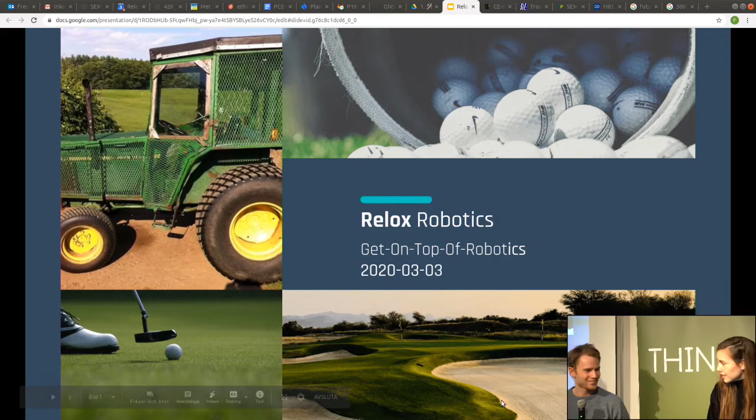Okay, we're ready. Hi everyone, I'm Marcus, and this is Fredrika, and we are from Relox Robotics. We develop mobile autonomous robots, and in this presentation we're gonna start by telling you a bit about what we're doing, who we are, and why we're doing it, and then hopefully give you some advice and tips and tricks we've learned during our journey with this company. So let's get started.

Here you see a range, our first customer, or place for our robot. This one is a bit larger than what they commonly are. Here people are standing in a long line, hitting golf balls on a large field, and over time these balls get spread out randomly on the field, and somehow they need to be collected. So how do they do it? Today they have a tractor or golf cart they use to collect these golf balls, and they also have a trailer in front of the cart that collects the balls.

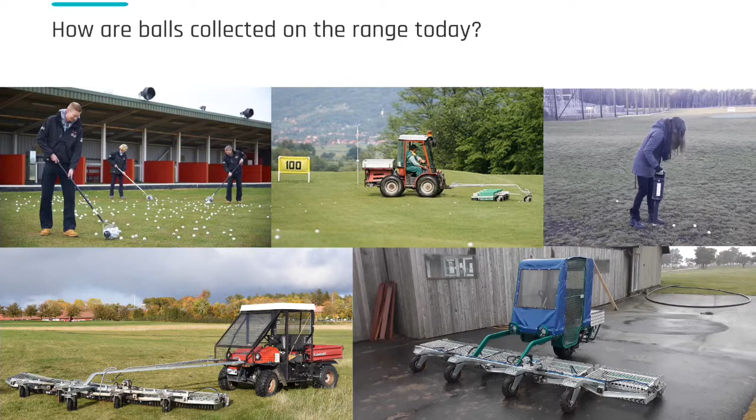In some cases they actually have even simpler equipment. In the top right you see Fredrika testing one of these more simple ways to collect golf balls. As you can imagine, it's quite time-consuming doing that compared to the picture I just showed you. So we simply want to replace this time-consuming, costly, repetitive, and boring job with a fully autonomous robot instead.

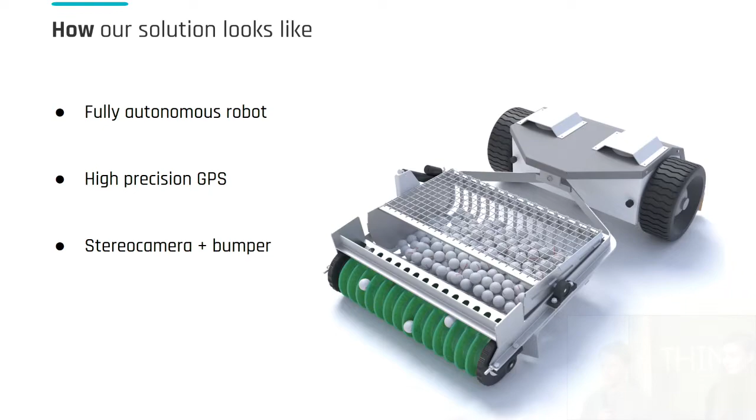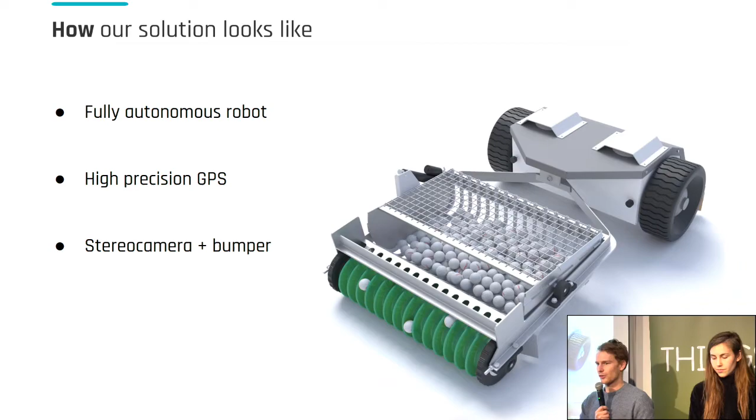We are using a high-precision GPS solution called GPS RTK to move around on the field, and that gives us a lot of advantages. We can optimize the path the robot is taking depending on where the golf balls are, etc. We also have a stereo camera and a bumper on the robot to avoid hitting objects such as signs or flags on the golf field. And we're using 4G, so we can do over-the-air updates to the robot.

And we also got into KTH Innovation while we were studying, and then eventually we got into Sting. For over a year now we've been here at Sting, so we have a room just above us that we are sitting in.

Quite quickly there was a lot more work than just building the robot, which we think is the fun part. So we had to have more people helping us with building a company. That's why we hired a CEO called Fredrik, who has some business background. And then we also hired a guy called Mats, who's helping us with sales and partnerships that we have.

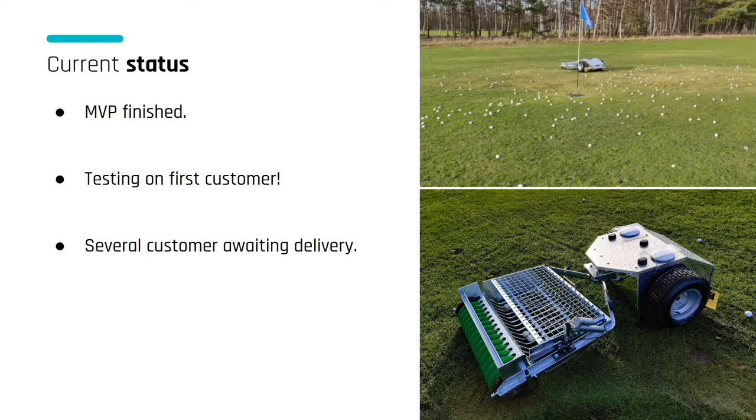So where are we at now, you might wonder? At the moment, we have our minimal viable product finalized. Now we have started testing it on a golf course here in Stockholm, which is one of our first customers. So once we have done all of the tests that we feel are necessary, then we are ready to deploy more robots in Sweden, primarily to start off with.

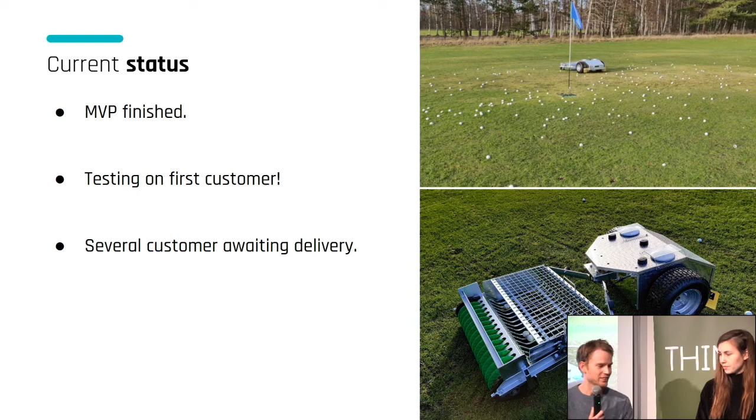And we already have several customers who are waiting for this type of product. So that was a bit about the company and what we're doing.

Yeah, so it's been quite a long journey from idea to MVP, and here you can see some of the iterations that we did along the way. We've also encountered quite a lot of problems during this journey, and today we wanted to share some of these with you so that you don't fall into the same pitfalls that we did. So if time travel was possible, we would like to go back in time and give ourselves a couple of pieces of advice to save ourselves a lot of trouble.

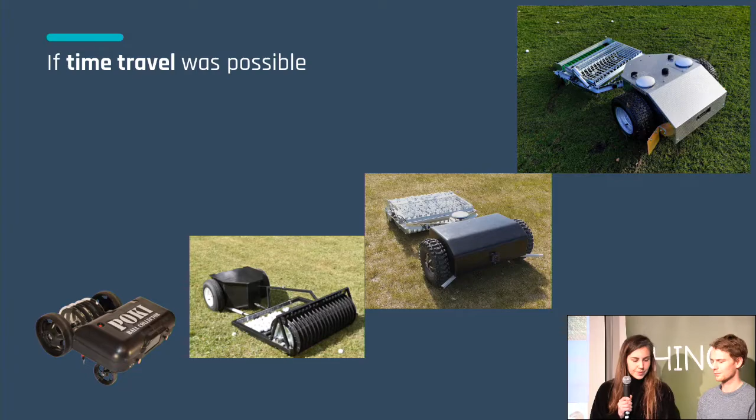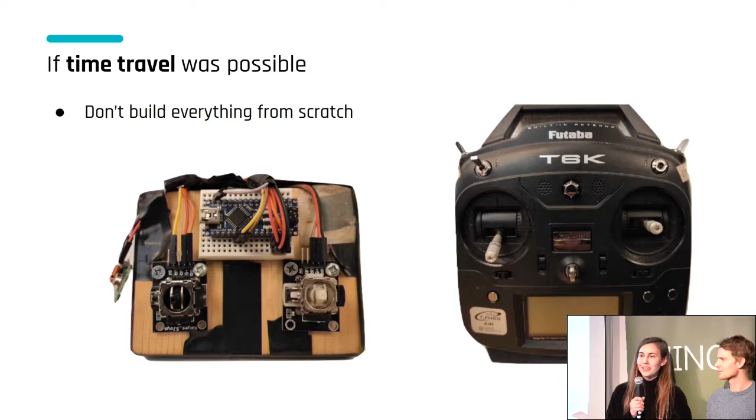So my advice here would be to spend a bit more time in the research phase, look into different ways to solve a problem, and not just start implementing the first thing that comes to mind. And furthermore, this is not even part of the core functionality of the robot. It's just a device that we use to make the testing procedure easier. So I would also tell ourselves to focus more on the core functionality and not get sidetracked by projects like this. And even from an economical standpoint, it doesn't make sense.

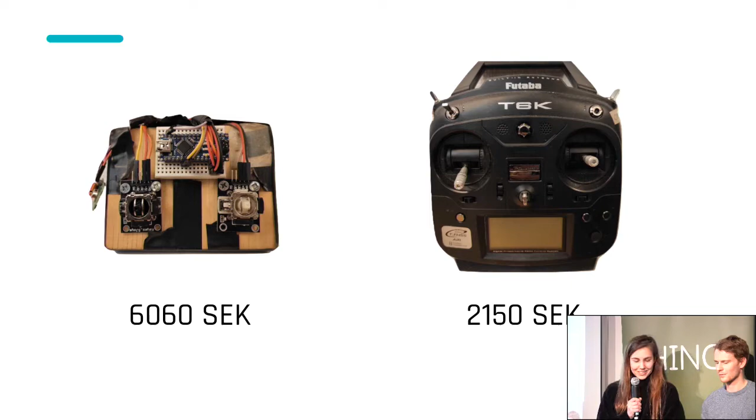Because even though this controller is a bit pricey, if we calculate the development cost for our own RC controller at 360 Swedish kronor an hour per person, maybe one day with 2 people to finalize this, plus maybe 300 kronor for component cost, then we end up at more than 6,000 Swedish kronor, which is way more than the controller.

The second mistake that we did a lot was that we were afraid to change our design choices, even though we started to realize that they might not work out. For a long time we used hub motors, shown on the left picture here. It's like a wheel with a motor inside it, which was very appealing to us because then we could easily mount it on a chassis and there would be no moving parts inside the chassis. So we liked that design very much for those reasons.

But we quickly encountered 2 problems with the hub motors. The first being that it was difficult to find a model that had enough torque, and the second one was that they do not often come with encoders with high enough resolution, which we needed to get position and velocity feedback.

So we tried to find workarounds and fixes for these problems, and we created a lot of ad hoc solutions, but all of these just created more problems in the end. So what we should have done is really take a step back and see what other solutions exist, and not stick to a bad idea just because you already spent a lot of time on it, even though it's very easy to do that.

So in this case, the alternative solution was to implement a full powertrain, including a wheel, motor, gearbox, encoder, and brake. In the beginning, we were afraid this would be more mechanically complex and take too much implementation time. But after a little research, we realized we could make the solution quite compact. The powertrain we're now using you can see in the picture to the right, and it doesn't take up much more space, and it's quite easy to mount. So that was definitely a change worth doing.

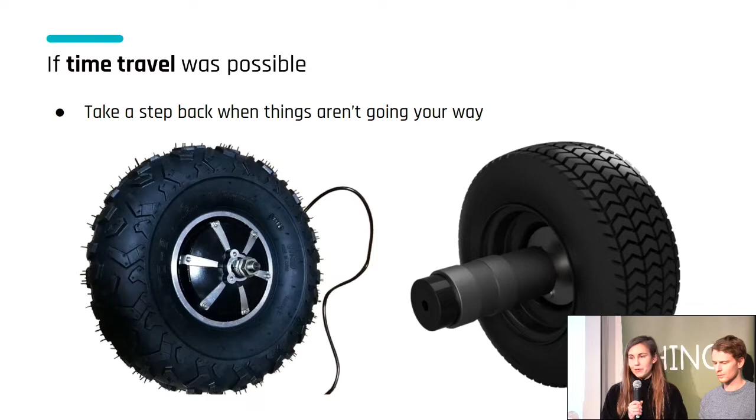So those were some of the mistakes we made, but there were some things we did well from the beginning. We realized that even though our idea was quite simple, the execution was difficult because you need a lot of knowledge in mechanical construction, electronics, and programming, and a team of just 4 people on the tech side could not have expertise in all those fields. So instead of keeping the idea secret, we had an open approach, talking a lot about it to different people, and that gave us a lot of benefits over the years.

For example, we started talking to golf clubs very early on to see what they wanted out of this product. We quickly found out that we have one competitor already on the market, called Belrobotics, shown in the top picture here.

We heard there was one golf club in Stockholm that already had a solution implemented, so we went over there to chat with them, and they gave us very valuable information about this product because they weren't completely happy with it. Firstly, it was just too small and didn't have enough capacity, so they would still have to go around with a tractor and manually collect the balls. Also, since it's just one robot that collects the balls inside itself and drags along dirt, etc., it would need quite a lot of maintenance for that reason.

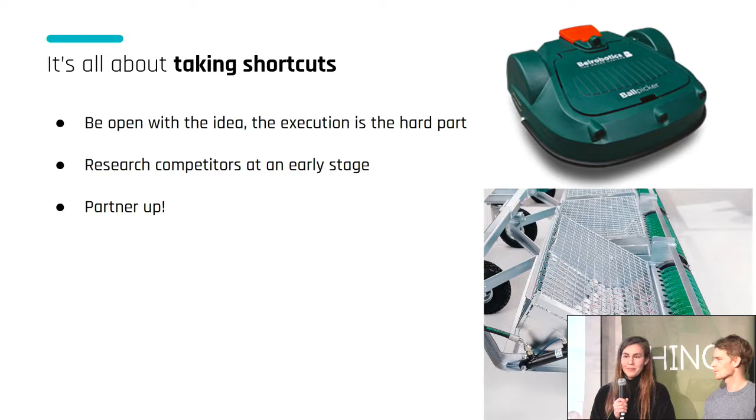Today we have a pretty successful partnership with them. They will do the production of our robots, and they also have a huge sales and customer network that we can access. Through this partnership, we can still focus on the parts we find interesting, which is developing better robots.

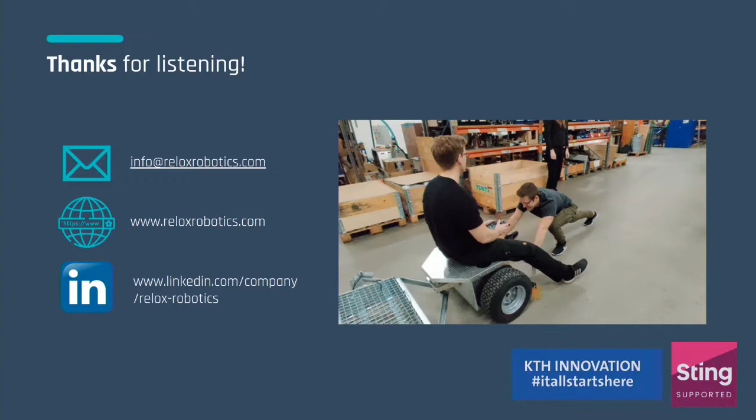So that was just a quick presentation from our part. Hopefully you got some tips and tricks on how you can more easily make a hardware related product. We're gonna be around, so feel free to talk to us afterwards if you want help with something, or if you want to know more about us. Thank you.

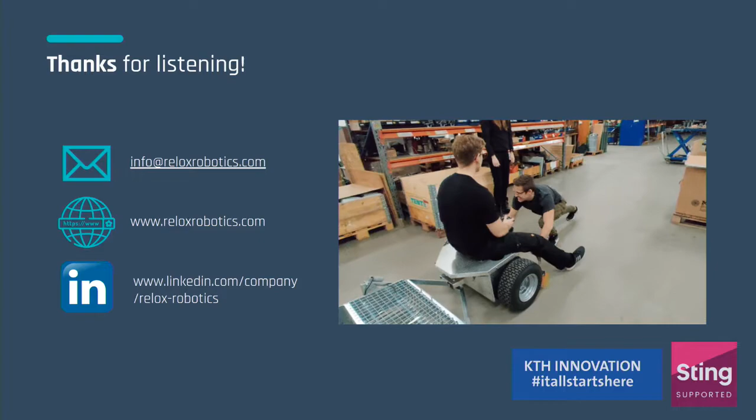Considered having a mentor that would give you that advice? Could you get that now?

Yes, like we have now, so that's something we realized later on. We didn't have one in the beginning, but now we've been in contact with many different people. We try to ask for help whenever we encounter a problem. For example, we have a PhD student in mechatronics that we have meetings with quite frequently.

Well, I was more thinking, you're a typical KTH student, like myself, just very technically focused.

Yes, in the end you need to sell it, like you said, you have a CEO. So this is what I would expect from a mentor, to have this overall view.

Okay, you both need a product and perhaps find a company and blah blah blah blah blah. All this. Yes. So,

No, but that's partly when we realized that we needed to expand the team when we hired Fredrik. So he has that role a little bit, but yeah, on the tech side, of course, there is still need for mentors. But now you have a very senior person in the board. He's very good, if you ask me. He's a very good mentor. So I think you're right, it's very important, you navigate very well. I'm really happy to have you here. And it's funny when you describe your journey, it sounds like it's 35 years, but it's rocket speed. So great, thank you so much.

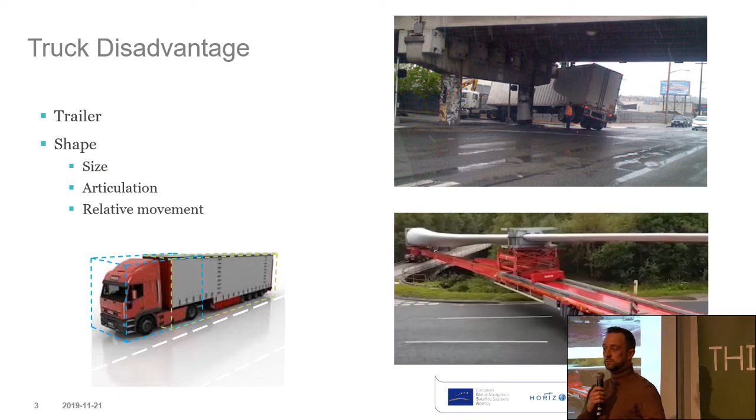However, trucks do have an advantage. I've talked about technical disadvantages - here I'm going to talk about more business rollout of autonomous vehicles advantages. So trucks do continue to work autonomously in controlled areas: mines, ports, depots. If you've seen Volvo, they've announced Brønnøy in Norway, which is an autonomous truck taking chalk or lime from a mine face to a depot. Because it's a controlled environment, you don't have to have the same safety requirements on the system.

And another - with the type of industry that you have, trucks are very, very much in use there. However, when you're in a controlled environment, you do want to take that produce somewhere else. And that's why motorways are the next key thing for trucks, hub-to-hub transport, whether it's port to a logistics center or a mine to loading a boat or something. It's a commercial application, so there aren't very many private people who have a truck.

Which means it's a business-to-business model. It means you can facilitate selling your service, whether it's transport as a service or you sell an autonomous vehicle to a customer - that's much easier to get out to the market. And they're already doing highly autonomous operations, so it's not a new thing for their customer base to accept. If you liken it to Uber, it's a new model for private citizens, whereas commercial customers are already used to this type of application.

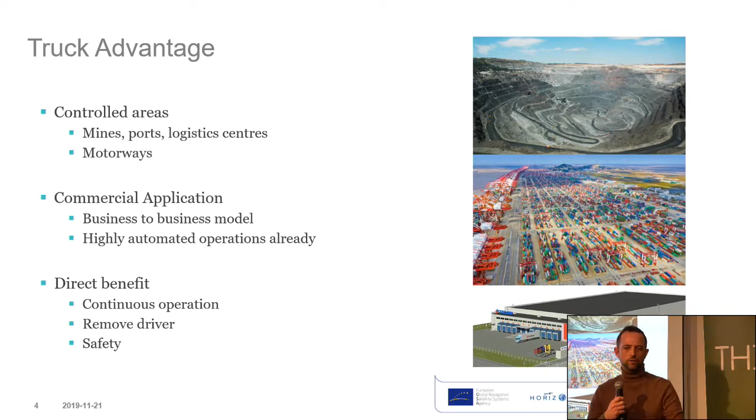If you're all familiar with robotics, I'm sure you're all familiar with this: sense, perceive, plan, and act. I've added test - when we're talking about real products, we actually need to verify that the whole system operates even in unexpected environments, as one would expect, or safely at least.

I'm going to focus on sense and perception, which is what Waysure were involved in predominantly. I've listed the partners and their main responsibilities. Scania effectively were right through the system as the platform owner, but specifically they worked on the planning aspect and implementation of the recommendation to change lane or brake or whatever was decided.

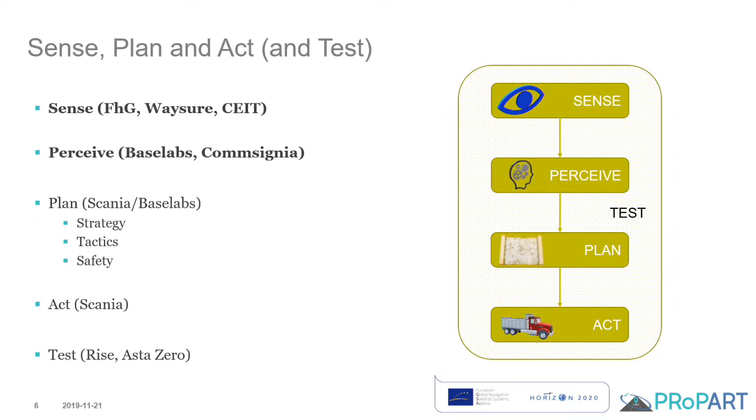So focusing on sensing, high precision positioning is what Waysure delivered along with Fraunhofer and CEIT, which is a Spanish research institute. We use GNSS - we get to about 2 centimeters absolute accuracy. It's the same system that Relox introduced, RTK INS. We do it in trucks, which has its own unique problems. We also use ultra wideband, which is a local ranging - it's still a radio frequency positioning technology, but it's good to augment GNSS.

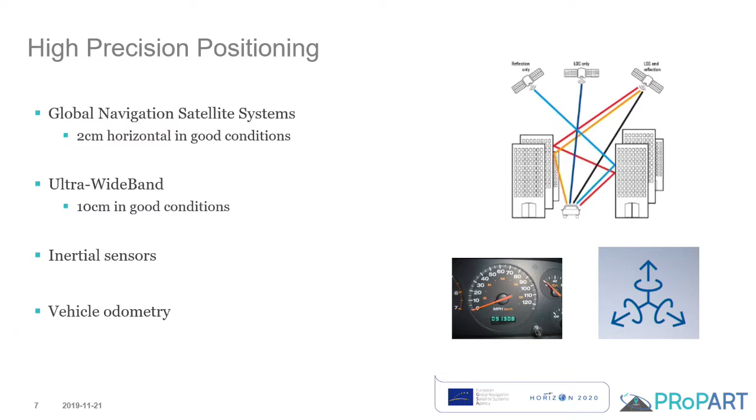As you can see from the picture, GNSS suffers from multipath occlusion and various other things because the satellites are - well, it's like trying to see a 20-watt light bulb that's 21,000 kilometers up in space. It's quite a weak signal when it gets to us. We also use inertial sensors: gyroscopes, accelerometers, magnetometers, barometers if they're good enough, and vehicle odometry, wheel speed or differential wheel speed. Putting all that together gives us very accurate position, velocity, attitude and heading, which is required for trucks.

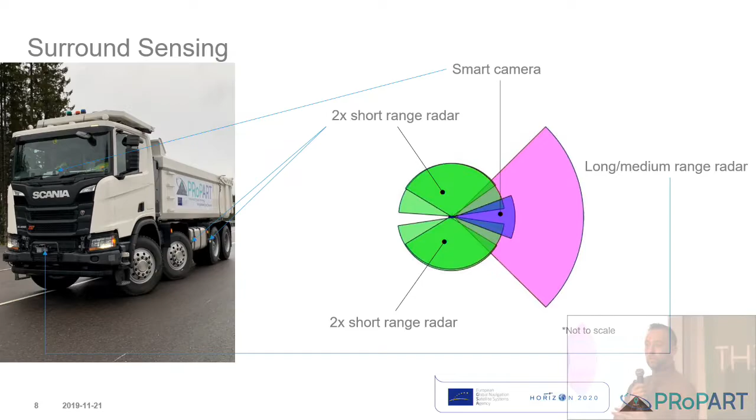Surround sensing - so positioning is great, but it doesn't tell you where anyone else is, so you have to be able to see. In the application, we used a long, medium range forward-looking radar, side-looking radars, and a camera. We had LiDAR, but we weren't allowed to use it.

Maybe a little aside - being a small company working with a large company, your access to specific parts of the CAN bus or data is very limited because, of course, they have their own relationships with other suppliers of competing or similar technology. So if you are looking to work with large companies, there is some friction there. Obviously it's still beneficial, but just a heads up.

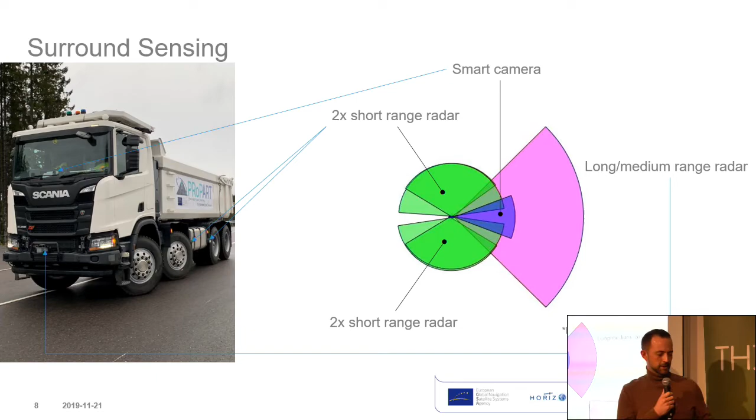So the infrastructure we put in place so that we could see behind the vehicle was a traffic radar on the side of the road. This is the traffic radar here, and this is an ultra-wideband unit, which we used for local ranging. We also put GNSS corrections in place—to get down to 2 centimeters, you need a correction service, and we put that in the infrastructure.

Now, the purpose of the project isn't to suggest that at every on-ramp there will be roadside infrastructure. Some people are implementing that in Austria, Hungary, and Italy, but it's a large step to expect a radar at every on-ramp and off-ramp. This was really to demonstrate that if a truck can see behind itself, even from someone else's information, then it can operate safely.

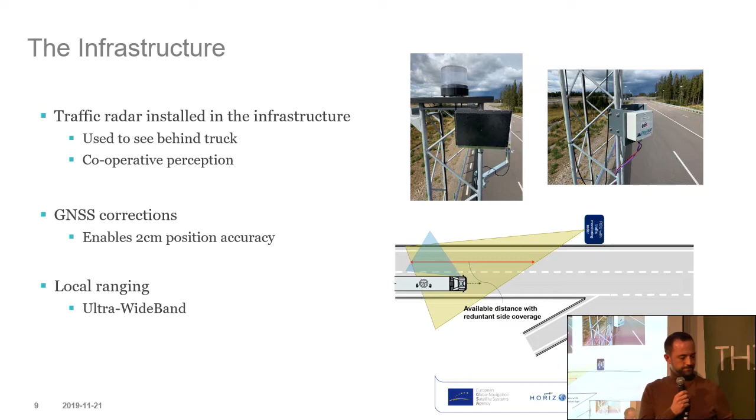So perception—when you combine all of this information, position with respect to a map, onboard sensors, offboard sensors—what does that tell you? Well, hopefully it tells you if there are any vehicles in the lane which you wish to merge into or ahead of you.

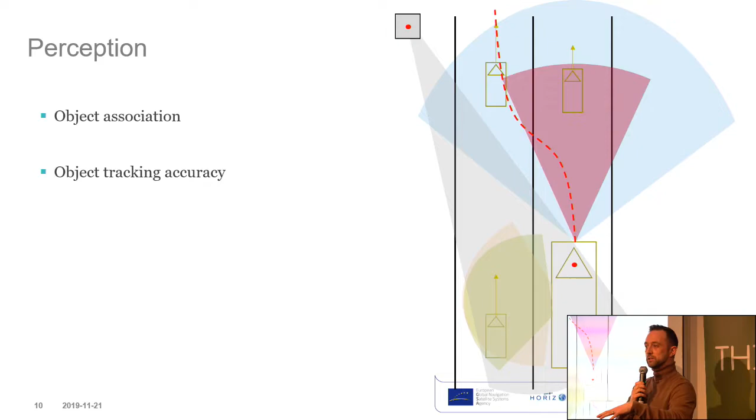Key to understanding the perception is, can you associate objects? Without getting into too much detail, if you see a car in front of you and the traffic radar also sees a car in front of you, is it the same car or multiple cars? If you don't have good enough accuracy, can you associate all of these different objects you're seeing around you? And how well can you track them? Does having more information about something mean you know where it is more accurately?

The results—there is a YouTube video which I can share with you. This is the highlight, which is that the driver was hands-free through the whole trial. I'll speed it up—I understand I've probably taken longer than I should.

The result of the trial was that the truck, throughout the whole test, could drive autonomously with a look, no hands, no movement from the driver. Braver than me—those things are pretty scary, and they turn pretty sharp. So that was the result of our trial.

I'll go into some of the lessons learned. For us, whether it's combining sensors that are on the same platform or on a different platform, having a shared reference matters—lever arms, for those of you familiar with it. If a sensor is on a remote part of the vehicle, you really have to make sure you understand where that is with respect to the center of the vehicle.

You also need a shared time base. If you're told where something is, that's great, but if you're not told when an event happened, it's pretty much useless. If you're told when it is, but it happened ages ago, it's pretty useless as well. So whenever you're designing a robotic system, all your sensing elements really need to be low latency, and they need to be synced with one another. Otherwise the information is not useless, but it's certainly less useful than it should be.

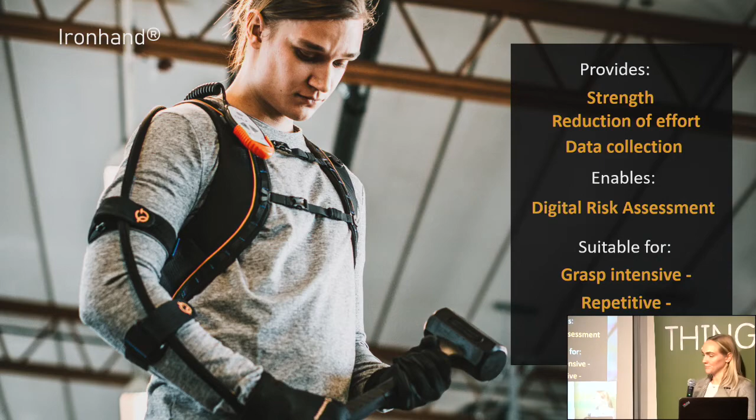So now you can see what the system looks like on my colleague. And the system is equipped with pressure-sensitive sensors on the fingertips and artificial tendons that run through the cord back to a power pack where the motors and the battery is placed.

So we are a company from Sweden, located in Kista here in Stockholm, and we are about 30 employees today. We were founded in 2006 as a project between two professors from the Royal Institute of Technology and the Karolinska University Hospital. They had an idea to help patients with a weak hand grip.

If you fast forward about 7 years, we launched our first product to the market in 2013, called the SEM glove. SEM stands for soft extra muscle, which is also the patented technology that we use in our industry glove.

In 2015, we started getting a lot of interest from industries to use the technology to prevent injuries rather than just helping existing injuries. When we started in 2006, we were one out of two research projects within the area, and the other one was General Motors and NASA.

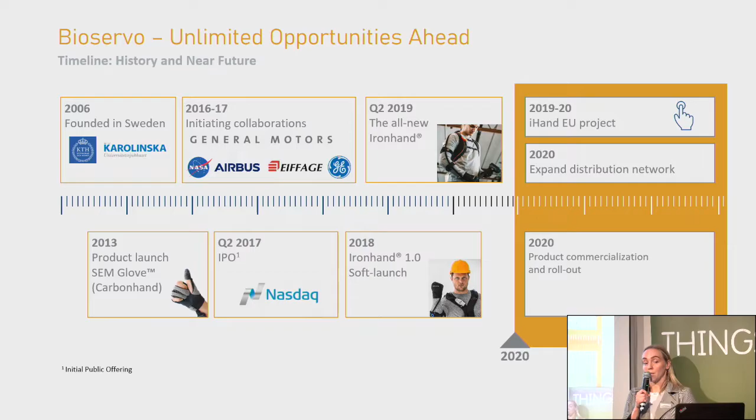During this year, 2020, we will finish our EU project, iHand, and we will further expand our distribution network as well as the product commercialization and the rollout of Ironhand.

Since we are a pretty small company, we need to make sure that we use our resources in the most effective way possible. For us, this has meant that we are focusing on a few well-chosen segments: automotive, aerospace, and construction. Within each segment, we have a partner that is helping us test the product in their daily environment and giving us feedback to make sure that the product is actually ready for the industry market.

In the third quarter last year, we signed agreements with a few partners for distribution of Ironhand. We signed partners in the largest markets, which are the United States, Germany, and France, and a few other European markets as well. In France we have two distributors: Gobio is for purchasing Ironhand, and Loxam is for renting out the Ironhand.

A few weeks ago, we launched Ironhand 1.6, which is the newest version of our system. This upgrade is very much focusing on the user experience of the system and improving it. We want the users to actually want to use the product, because we know that's a factor for success. Part of this launch was Iron Connect, a smartphone-based app for profile management and configuration of the Ironhand glove.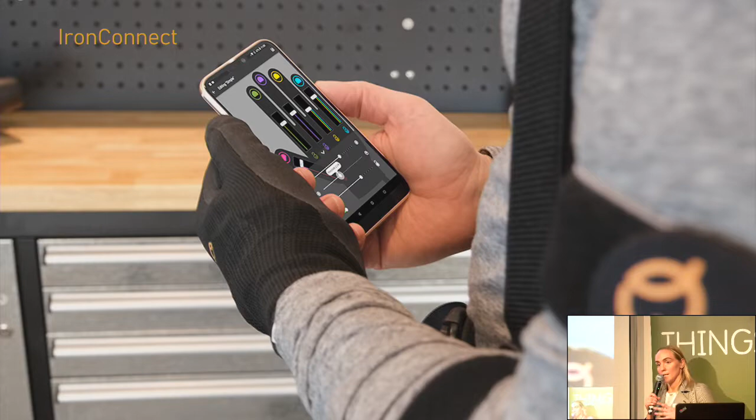This allows the operators to adjust the settings in the glove throughout the workday, but also to create customized profiles to make sure that the glove is suitable for their specific needs and their specific work task.

So, what are some of the success factors at Bioservo? We always strive to work very close to our customers to make sure that we actually fill their needs. Our customers' and partners' feedback has always been the basis for our development. We need to make sure that for each customer, we take in their feedback, and then we go back and develop and further improve the glove to make sure that it fits their industry.

We are also trying to be very agile and adaptive. For example, from the beginning, Iron Hand was only planned to be a strengthening glove. But as soon as the customers heard about the sensors in the fingertips, their first question was, can you collect data with this? From that moment, we started developing the digital risk assessment that we offer today.

We are always focusing on the user experience, and when we do improvements of the glove, we have the end user in mind. From experience, we know that if the user on the floor does not want to use the product, it would most likely just hang in a cabinet somewhere. So we are continuously trying to improve the product and make it more comfortable and easier for the operators to use.

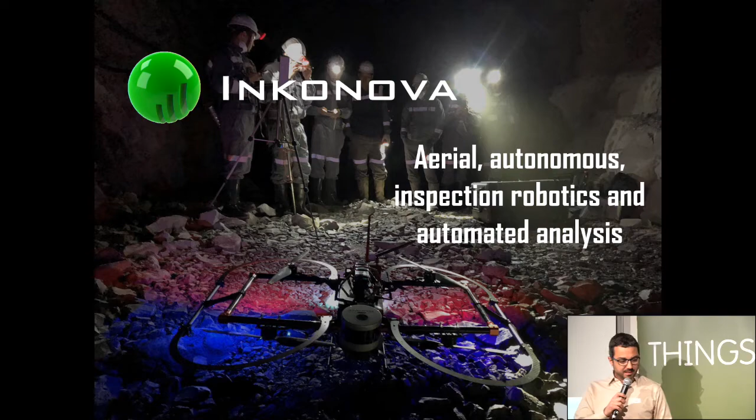Good afternoon, or evening for some of you. So my name is Pau Mallol, and I'm the CEO and founder of Inkonova.

Inkonova develops autonomous inspection and automated analytics for industries and industrial applications. We started 3 years ago with underground mining. What we do right now is commercialize a laser scanning drone that we fly in inaccessible areas and collect 3D data and generate 3D models using LiDAR.

You have here, you can take a look later, one of our oldest prototypes, but you will see pictures of the commercial unit that we just delivered last week in Chile. Unfortunately we don't have a commercial unit here. But this works, and we develop a lot of software first on the prototype, then roll it out to the commercial units later.

So in a nutshell, the problem that's very common underground in mining especially is there are many inaccessible areas. They can come from operations themselves, like when they blast an area, it's very dangerous, and you shouldn't get in there until it's secured, which takes some time. But there are also accidents and other scenarios. So it's very common to find areas that are inaccessible, or just difficult to access.

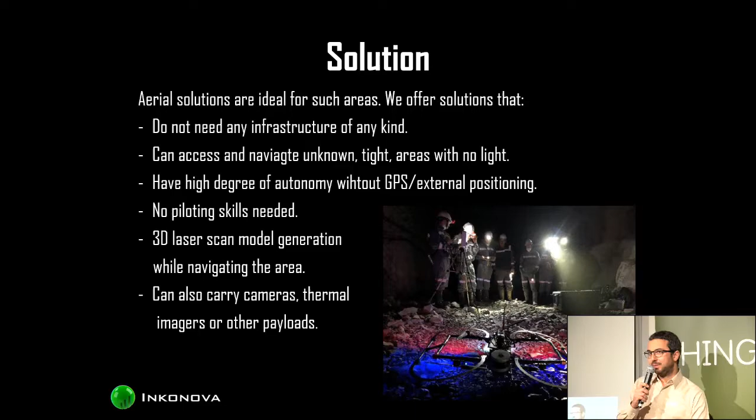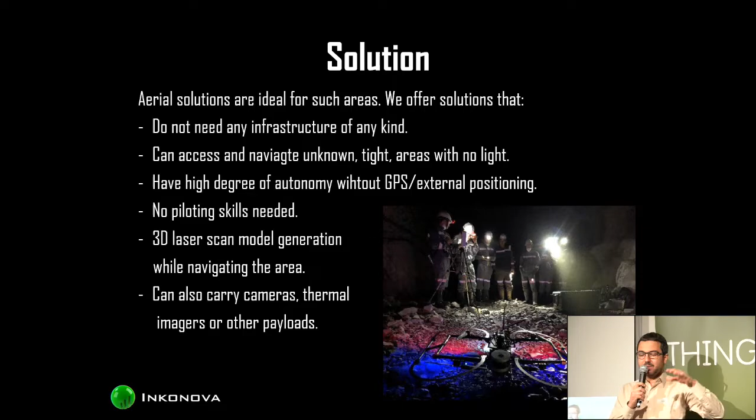That had several complications. First, the awareness - you see basically forward or where the camera points, but not in the back or the sides. Also you had to really have steel nerves. These are very expensive equipment, and if you lose a drone in inaccessible areas, you lose it, literally. You could have chains hanging, a lot of things popping out from the sides that are not easy to see.

So after that, we saw that we had to basically automate the operation of the drone for increasing safety, and especially for the user experience, to make it easy to use and easily adopted by the industry. We said, okay, we can't access this LiDAR that we are carrying right now, so let's develop our own laser scanning system.

Since you get 3D data in real time, you can use that for many cool things that I'm going to show you soon in a video. Not to mention you could basically base your collision avoidance on this 3D data and so on. So we started working on our laser scanning solution.

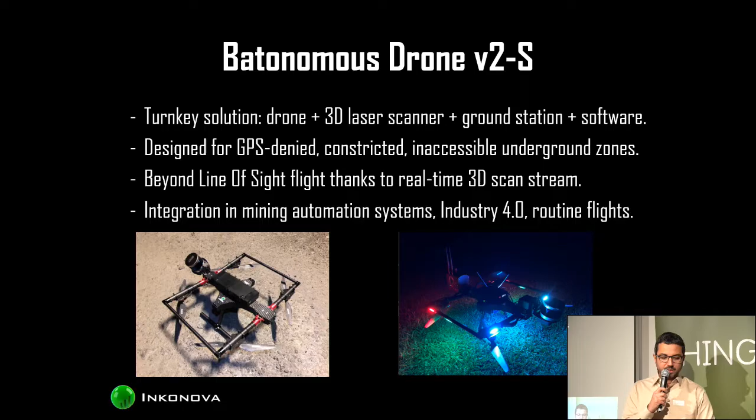This is a picture from Chile, the unit that we sold there. In a nutshell, you have the drone that we developed for underground. We considered using DJI and other off-the-shelf drones, which some competitors use, but there are disadvantages. First, you don't have real access to the whole software of the drone, so if DJI decides to stop offering the SDK or some access, or change something, you might have issues there.

And also, we learn a lot of lessons from these years flying manually underground. This drone is developed by us for underground environments, not as much this one, but the commercial one. Then this is a computer module and the LiDAR module.

Both are modular, can be released very quickly without any tool from the drone, and used for handheld scanning or whatever. So this unit can also scan above ground. We have done tests in parks and power lines and so on, because the point is that we use SLAM for localization. That's a big word that is important to mention. Otherwise, we couldn't localize the drone underground because there is no GPS or infrastructure. But the good news is that you can also use it above ground.

So I'm going to show a quick video, if I can play this. Oh sorry, the sound. One second.

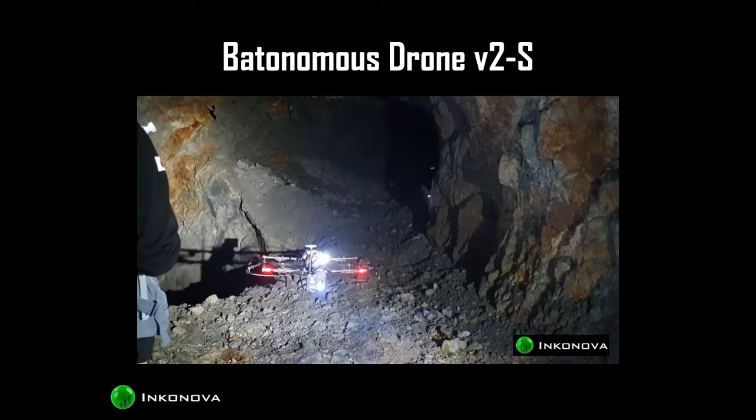So this is what we see in the computer in real time. We can put the drone anywhere and we see the point cloud, and we can actually, as you will see later, zoom in and out and rotate to find the best path later if you want.

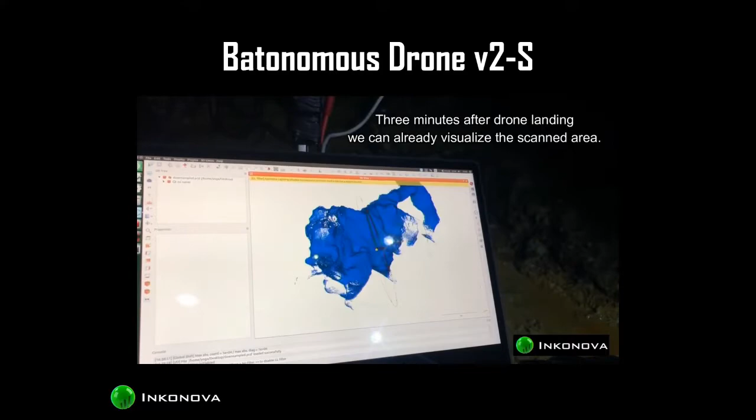So basically, sorry, I will, one second. I actually didn't want to stop it and go forward. Doesn't matter.

So what I wanted to show is that the map, the scan that you saw in blue right after the flight, this is what we call dual SLAM. We actually use SLAM for navigation and for processing the real-time data. So when we land, we just need to download the map and see it. We can see it underground and see if it went well, or if we have to repeat the flight or whatever.

And then the last picture, this was just one of 4 flights, and the result of this specific mission, let's say, was actually 2-level scans, which I'm going to show you in a second. So this is just a screenshot of rather old, actually. We keep improving the visualization, but this is basically what you see.

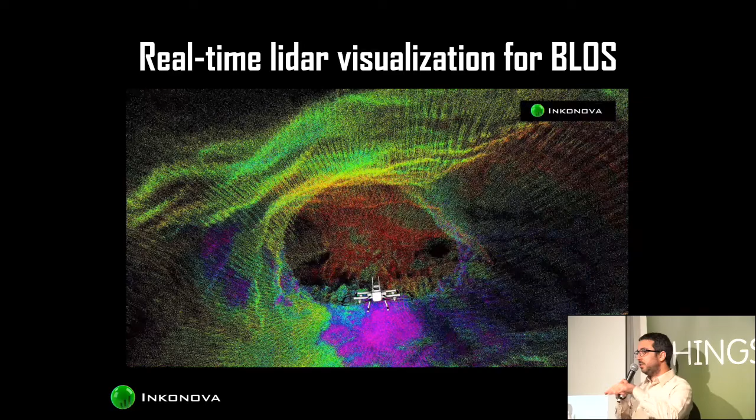You see the drone and the drone model, which is from our own design. And then it has the attitude of the drone, so you can see when it goes forward, as you have seen in the video, hopefully.

This is actually a very big scan that we made in Kazakhstan a few months ago. I want to highlight how actually quick one can do such long scans. Just to give you an idea, in these drifts, this is the size of a truck. Basically, trucks go in and out there, and you have also the scale here.

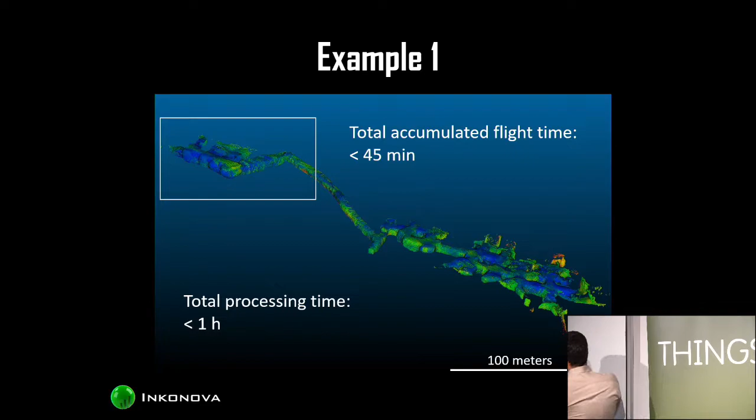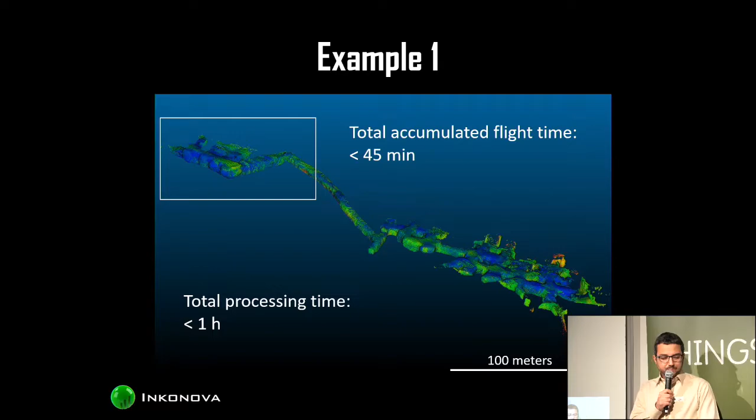But this was done in an accumulated flight time of 45 minutes, so not one single battery, but a few. And the processing time is approximately the same as the flight time. So it was actually under 1 hour.

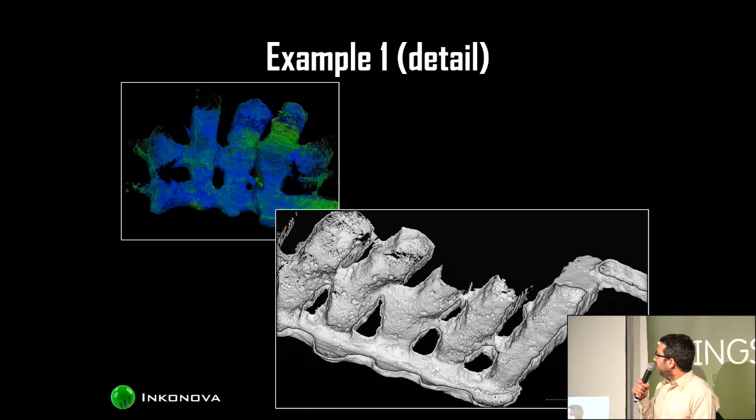This is actually a detail of the previous map. So we make a cut in the model, and you can see how detailed we can get it, with stones and so on. And this is what you saw before.

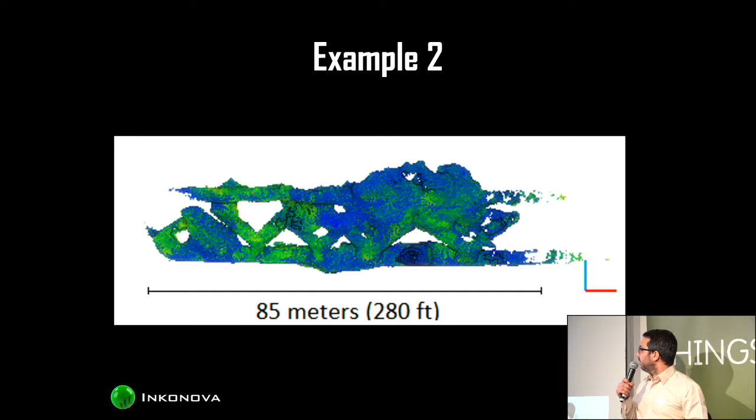This is a screenshot, so the quality is not that good, unfortunately, here. But basically, the video that you saw scanned this part here. And then what we did with other flights was the bottom level, 3 flights in this, as I'm indicating now. And then we merge, we have also a script that can actually merge maps automatically, because these individual scans have to be merged later.

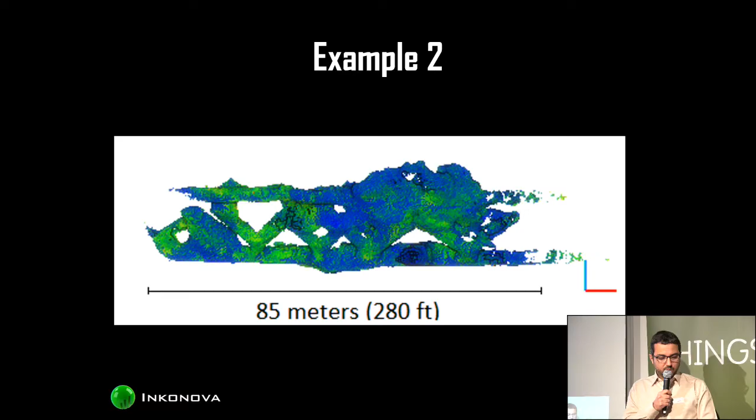So this is the conclusion of my presentation. And if you have any question or recommendation or advice, I'm here for you.

It's usually, sorry, the accuracy is, we use Velodyne LiDAR, and usually it's about ±3 centimeters. It depends on a number of factors, and the range is about 100, 120 meters, depending on the environment and so on as well.

Yeah, that's a good question. We are actually best at developing solutions and solving problems and finding problems that there are no solutions for. But right now, we are still talking to a number of local partners. Until then, we also have to service. So yeah, I have been 3 times in Chile the last couple of months. I'm going to Turkey probably this week, and next month in India. These are in talks. But yeah, both, I would say. For EU, I think we are also interested in doing services anyway, but we prefer to have local partners for mid to long term at least.

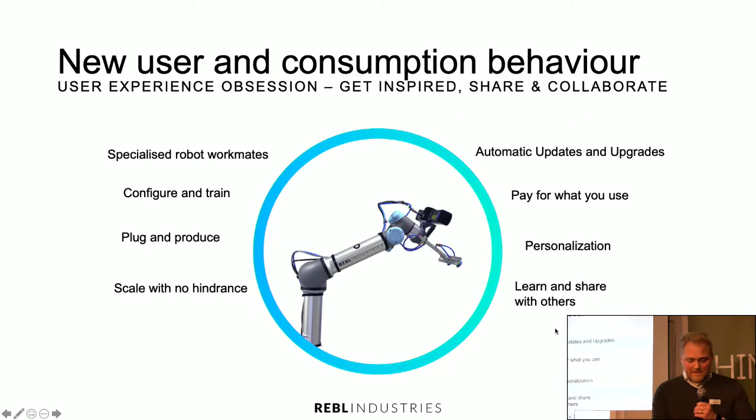So the baseline for everything in this world, I guess, is becoming fast, and fast in producing value. And this is what we try to live.

At REBL, moving into a bit more to the way of working and the solution and some movies, so you can see the flexibility in the concept.

So, of course, we have a lot of benefits working with robots instead of humans in terms of the employee contract. They can basically work whenever, whatever. They don't have any ambition in life, so what we train them for, they should be able to do and stay there.

So, our concept is that we're actually aiming to have a robot being able to be implemented in 2 days. I guess efficient time, we are like 4 or 5 days for our working installation.

So we're quite fast as we work with the configuration all the time due to the assignment, but we have some lead time usually. What drives up the time typically is when we need to 3D print a special tooling for the specific assignment, or work with a specialized quality assurance vision model or something like that. Everything that is special to that case, basically. But solving the picking, the grinding, the sanding, and so on, we can do really fast in that sense.

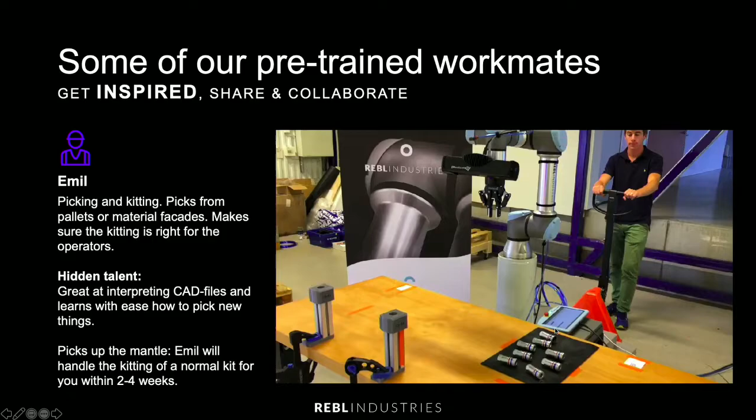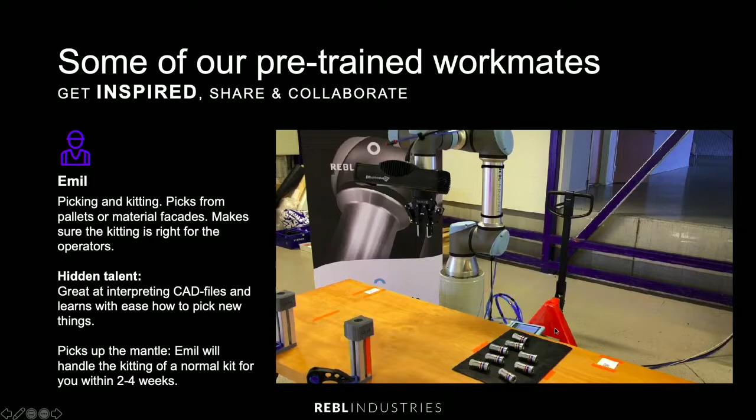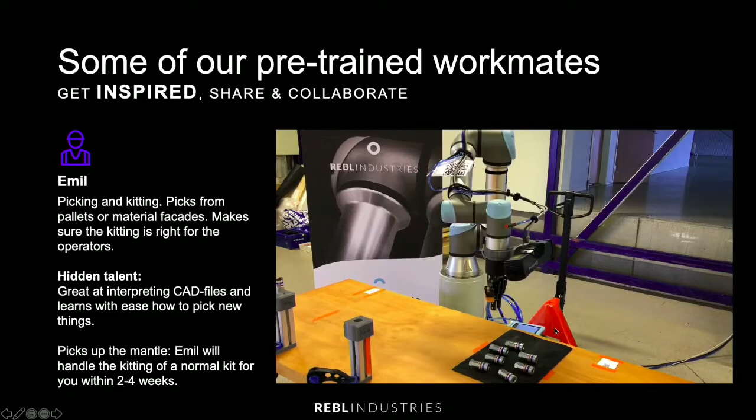Emil is coming to its workstation and starts reading up. This basically takes 10 seconds. What it does now in the background is updating its entire programming in how it came to it, how we did the virtual commissioning, and changing the configuration basically. And then it starts working. So this took us basically 2 or 3 days of work. And because we typically work with small configurations in how to scan and so on, we automate these things, but of course it's always something we need to work on.

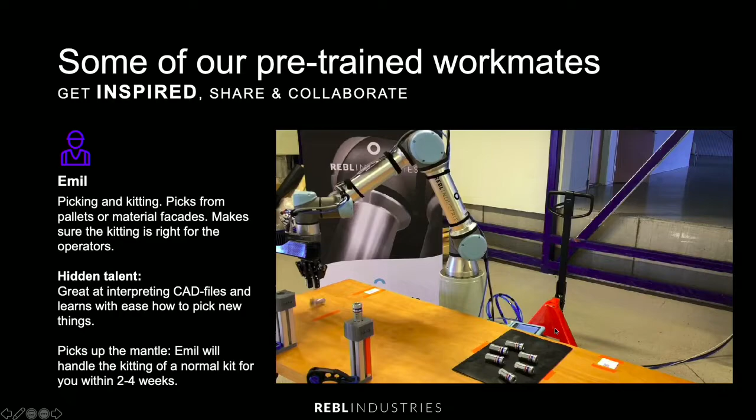Yeah, so that's one assignment. If we take another one, just showing a bit about how you can utilize 3D printing as a way of moving fast into the client and building workstations where the client has human operators, but also robot as operators, because every workstation we build should be able to sometimes be a robot there, sometimes be a person there. So here we have 3D printed tooling, because we need to use the vacuum tool in a quite different way when they do the assignment. We have 3D printed the way that the robot needs to work with the tooling, basically.

Once again, now we didn't see the element where the robot comes to its workstation and reads up on it, but basically it reads up on what type of object it's working on, how it should grip it, and how it should work with it. Just a way for you guys to see the concept in a sense. But as said, it's just as important to understand that this is a variable workforce, and sometimes you need to plan that now we want a human doing the work, and now we want a robot doing the work. And the robot should be able to, with no turnover time, move to another assignment and start working with it.

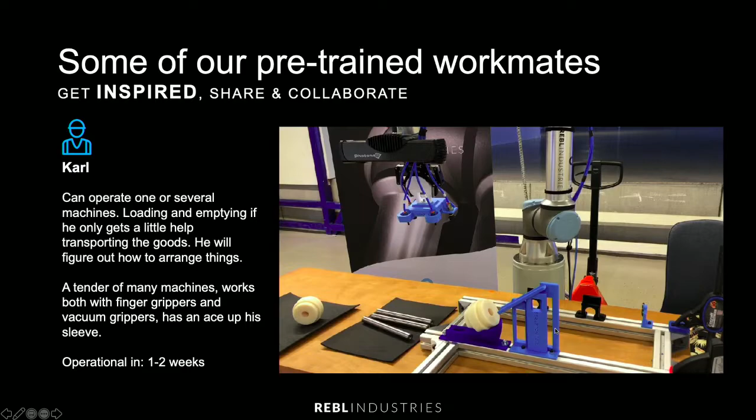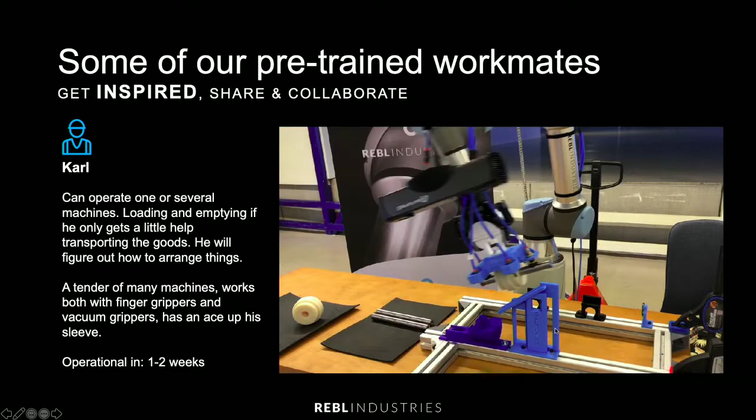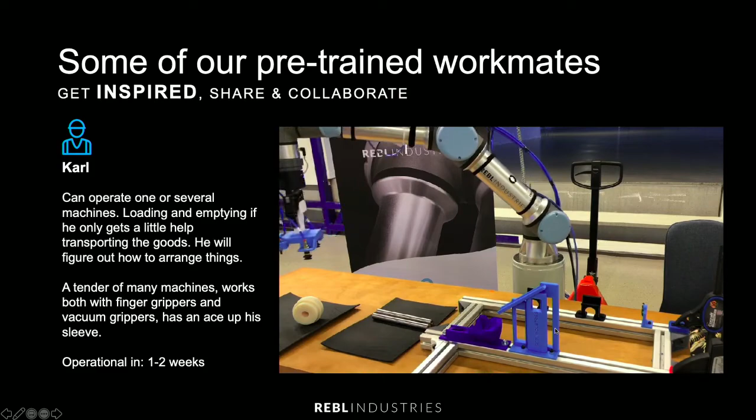So what we are building, I typically do the analogy to Sonos. I don't know how many of you are music fans, but their concept I like very much. When you put out speakers, you have some in one room, some in another, and you push your own playlist out, push another playlist out in another room, and then you swap them. Imagine the same thing but with robots. We configure the playlist for the robot, and we can distribute it fast, and the robot can change rooms and so on. This is basically the same concept as we are doing here.

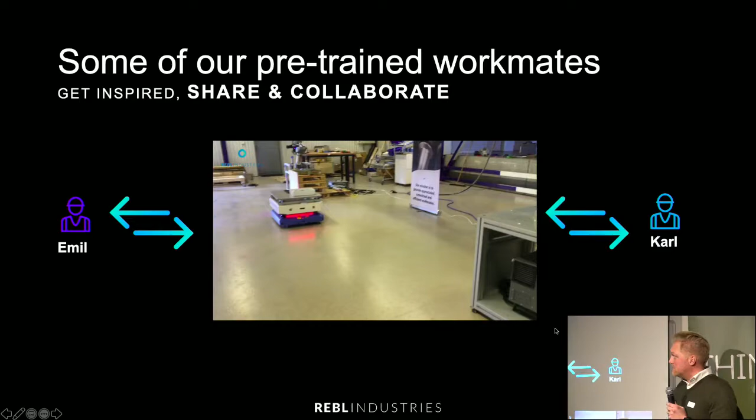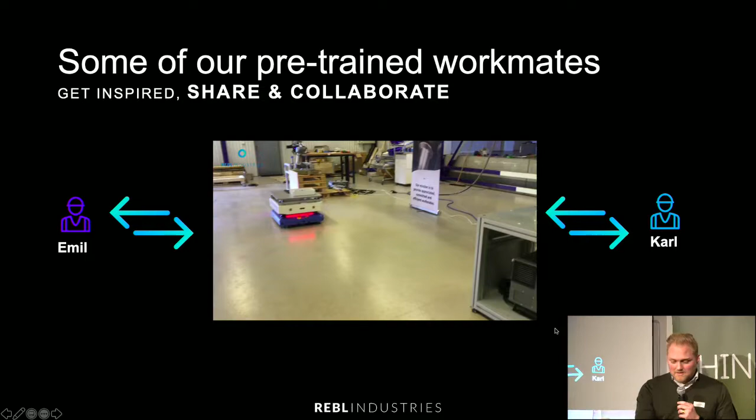As I said, we are based from research for discrete steering of discrete systems, so we are agnostic in terms of type of robot to steer. This is just an example of having two robots managing it with an AGV as well. It's a bit of a slower movie, so we don't need to see everything, but you understand the concept. Sometimes we want the robot to move, sometimes we want the material to come to the robot. It depends on the strategy basically.

Just so you get an understanding of different types of skill sets that the robots typically have. Another thing we are working a lot with is the user experience, and here is the IT side coming in from my perspective.

So, as said, we want to provide appreciated, committed and efficient workmates. That's the end point, and we always think about how to do this. So now we are thinking a lot about what's the next robot to support. Do we want a faster robot? Do we want a stronger robot? Or do we want something else? Because it's all about the capabilities. That's our next step basically.